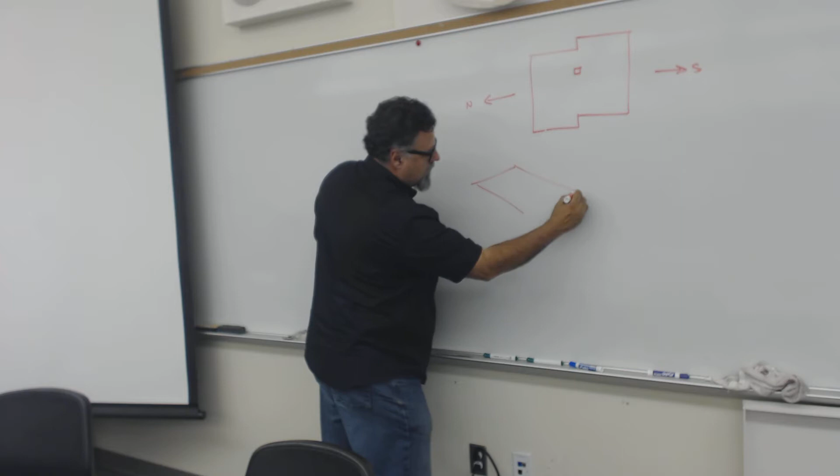Okay, so when I look at my box, so that I'm going to draw the box now. Let's say that that is south, okay?

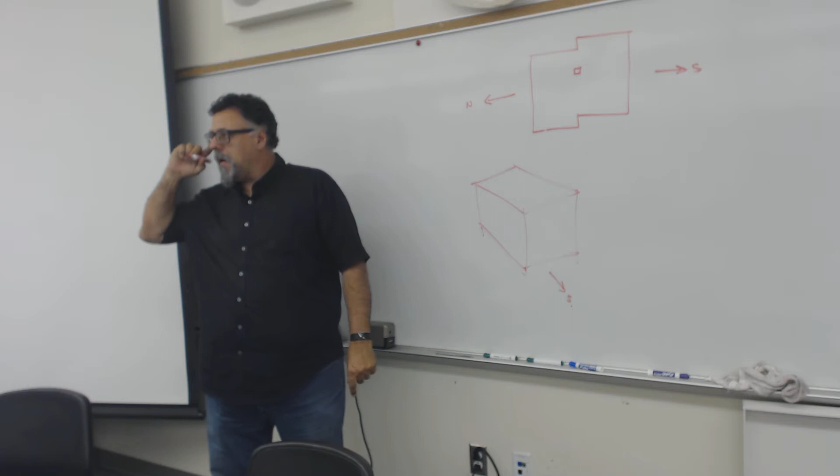So this is that. Now I told you guys that from here to here was 1/3, and then this is 2/3. From that information, can you tell me where the windows might be to illuminate the top of that podium?

First of all, let me ask this question. Can somebody show me where this corner in plan is on that?

Here? Here? No. Here? Next one. Here? The right in the middle. Come on up here, young lady. No, come on up here. So I want to see that corner point right there.

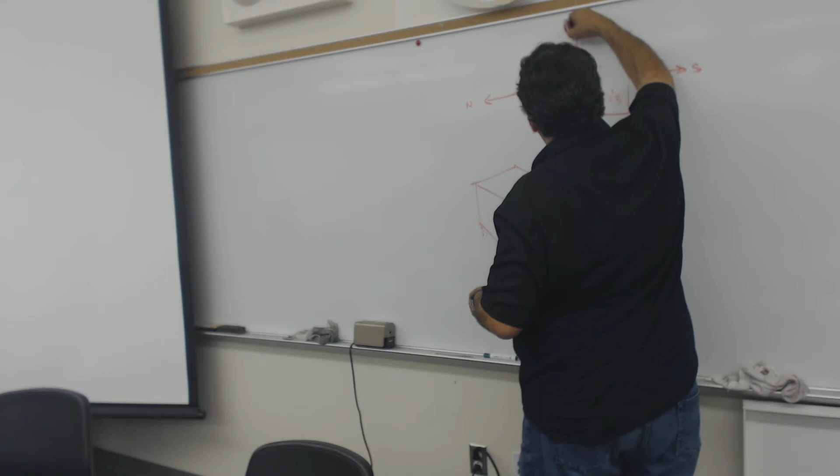Here's my porch. Right? There's the wood slats on the porch. My door's right here, right? Here's the sunset, there's the wood slats, and there's my door there. Okay, this is south.

Okay, got that? Okay, so for this one: south, north, east, west. For this one, south, the other side is north. This is west, and that direction is east.

So I want you to tell me where that edge of the building is. Come on up, show me.

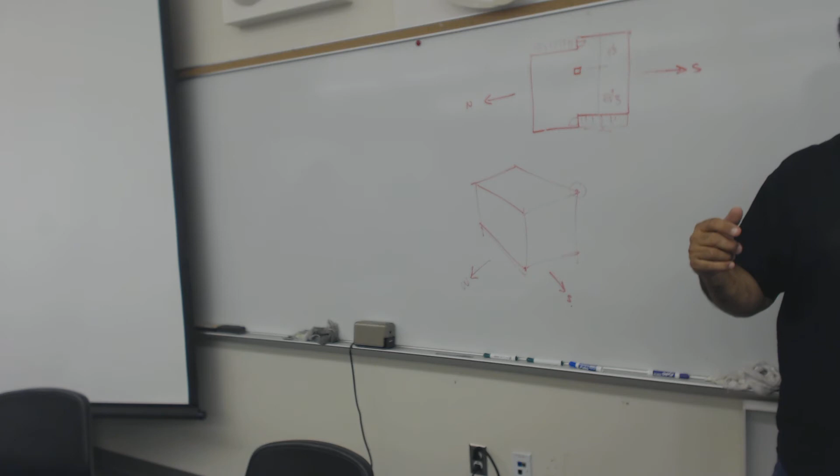Who agrees with him? So wait, if you agree with him, stand up. So they're trying to figure out if they're going to stand up or not. I guess I'll stand up. Well, you don't know why you're standing up. You don't know, but he just said he's going to jump off a cliff. You agree with him? No? Okay, so you guys disagree with him. Well, you got to make a choice.

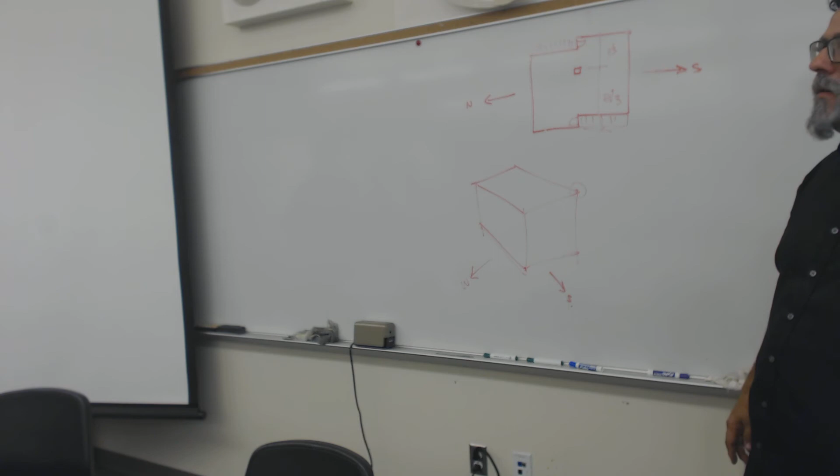No, there's no middle. Where's west on the top? This one? Yeah, that's east, that's west. That makes sense, kind of disagree. Well, let's talk. Because can't it also be the bottom one? No, it's the same thing. Yes, that's a good point. It could be anywhere on this line because that is going this way.

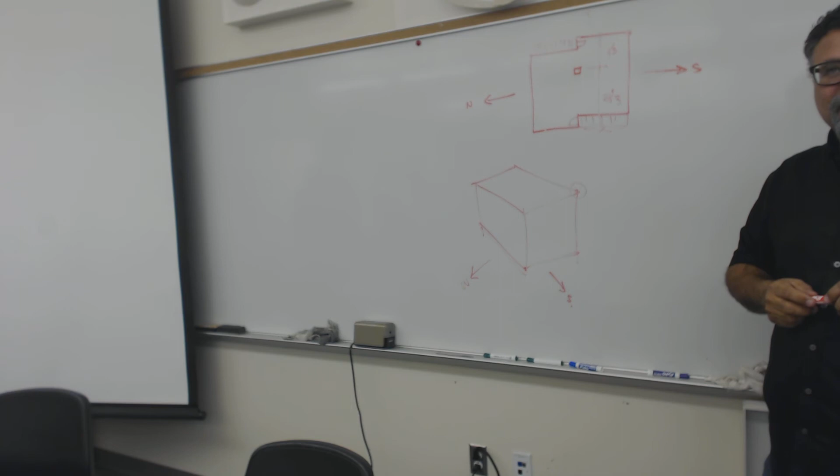Okay, so now do you agree? Yeah. Then stand up. Oh, so all of you agree. Okay, very good, you guys are 100% correct.

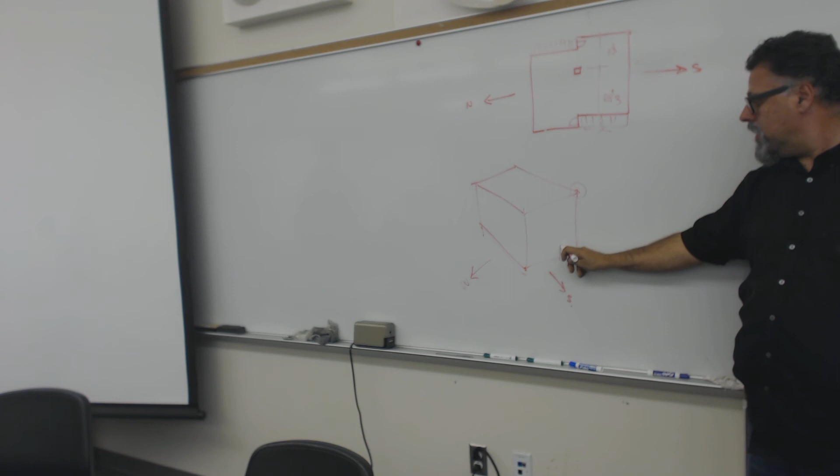So the windows for this have to go straight south from there, right? So we know that this is 1/3 of the way, and so those windows are going to be 1/3 of the way over. They're going to be in the line that's 1/3 of the way over and 2/3 of the way over from there. All of those windows will be in a row.

Okay? Be right back.

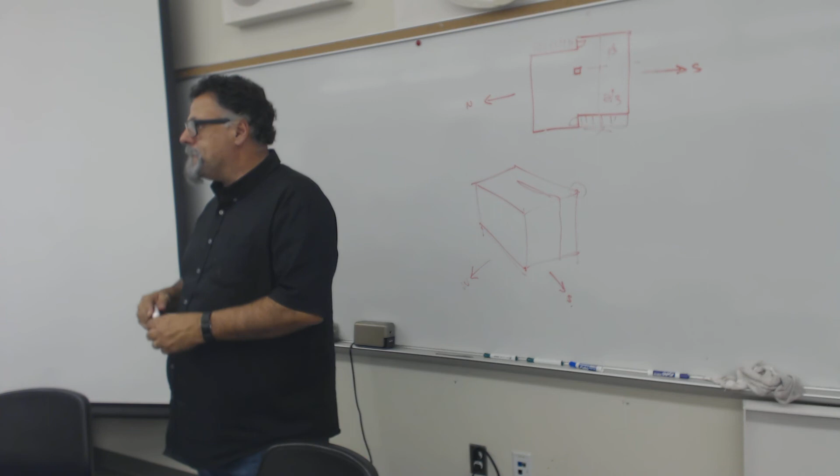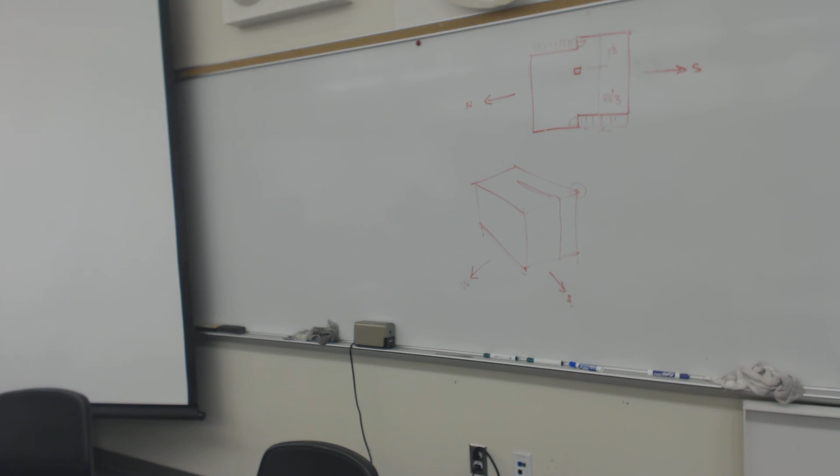Alright, so here's a project from last semester. Okay? Here's a project from last semester. So I'm going to pop the floor out. Here's the floor.